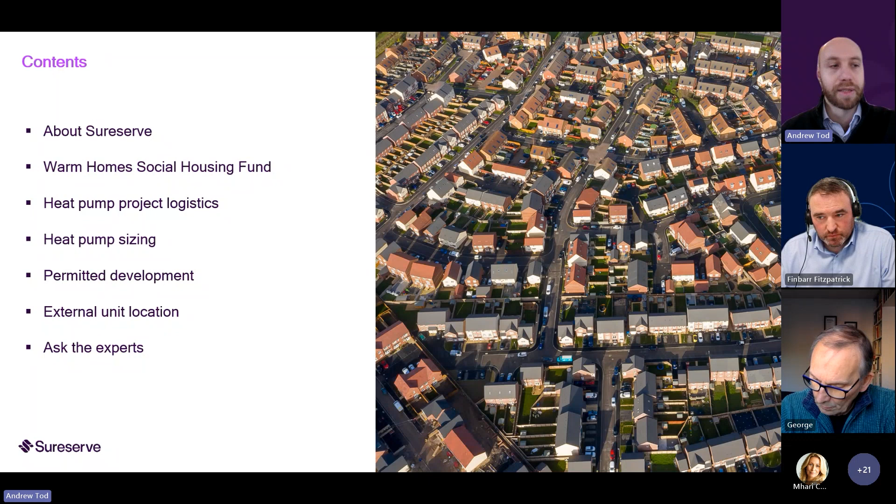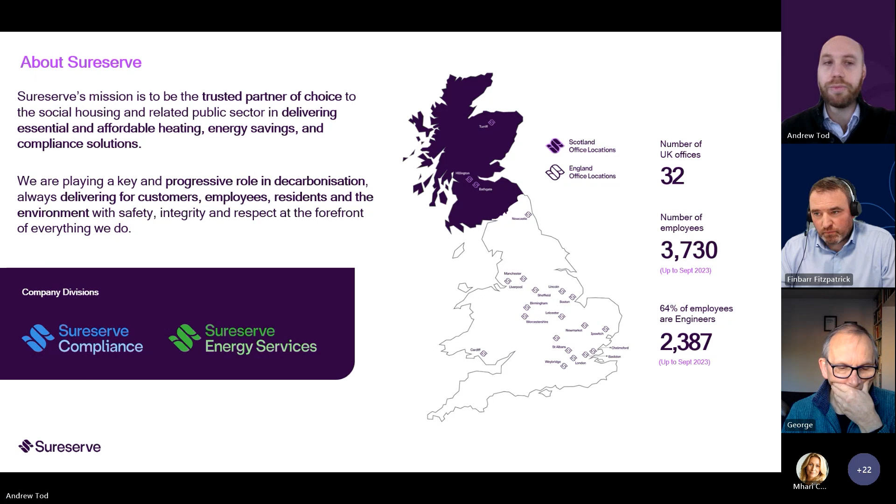We cover the big 6 of building safety and compliance, and increasingly we're starting to cover damp and mould checks as well for the homes that we're in, helping to spot and remediate issues early and protecting residents, and also helping housing providers with compliance with Awaab's Law.

And then on the energy transition side, we're leading social housing providers on their decarbonisation journeys, from typically the start position of predominantly fossil fuel heating systems towards a fully decarbonised housing stock. This would typically involve looking at housing stock data and developing long-term programs of retrofit, looking at opportunities for fabric improvements and ventilation, and then where we can upgrade renewable heating systems and inclusion of solar PV and batteries, and then monitoring homes post-retrofit to ensure buildings and heating systems are performing as intended, and looking out for opportunities for preventative maintenance.

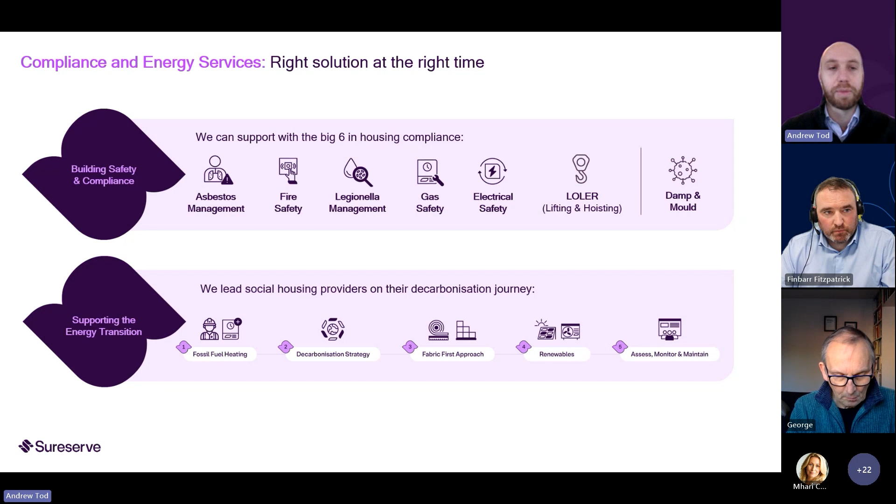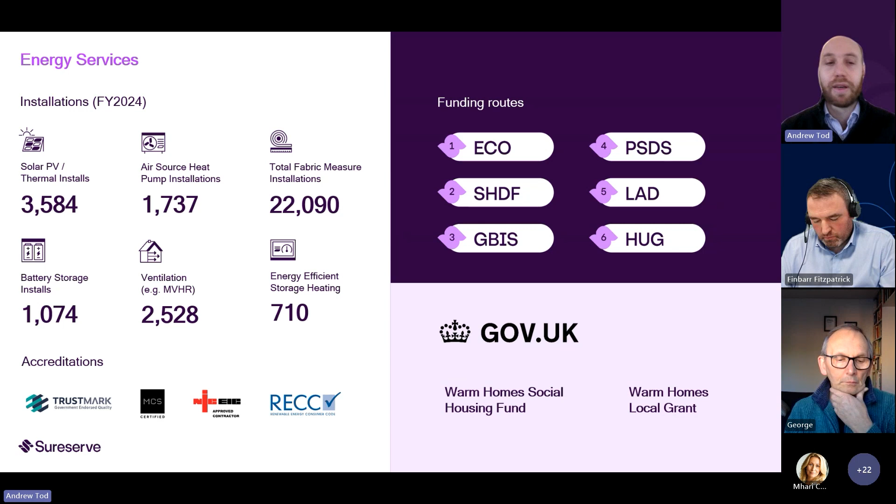This data on screen shows our installation numbers for low carbon heating and renewable and fabric technologies in 2024. And these cover all of the major government grant funded schemes. And we're also gearing up to deliver many more in 2025 under the Warm Homes Social Housing Fund and the Warm Homes Local Grant, which we've got the full set of accreditations to deliver.

And then we also have over 12,000 heat pump systems under service and repair contracts. The majority of those are air source heat pumps, about 10,000, but then various ground source, water source and exhaust air heat pumps. And so all of the insights that we gain from servicing and repairing these heating systems are fed back into our expert installer team. So they learn what works well and what doesn't in terms of how these heating systems are installed.

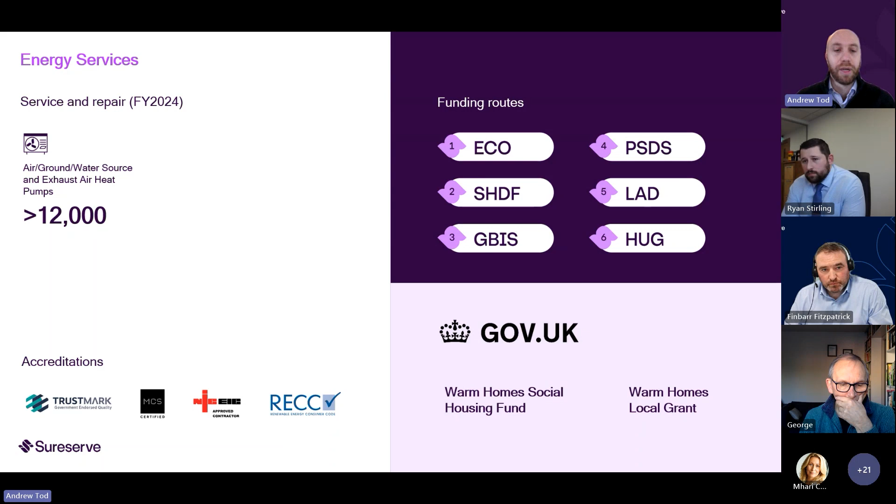Right, yes, so we've got the first poll where we want to hear from you. So firstly we want to understand your experience of delivering heat pump projects. So those will be launched, and then my lovely colleague Mhari will help to feed me the results because I can't see the screen, unfortunately.

So far we're looking at kind of 50-50. Well, it's changing all the time. But we have people who have not yet installed but are planning to, some who have delivered, and some who have done some individual but not at scale. So it's about 40% not at scale, 40% that have not installed but have some planning in place, and about 20% who have started to scale up.

Okay, great. So a good mix, and I'm sure that's probably common across the sector. People are starting to see heat pumps as the main technology of choice for decarbonising heating systems, so starting to gain experience on those projects.

The second poll then, if that could be launched, we'd like to understand your perceptions of heat pump projects. So is there nervousness, or are you fully behind them? So Mhari, once the results come trickling through, if you could just let me know what it's looking like.

Great, thanks, Mhari. Well, for those who are nervous, hopefully, throughout this webinar, you'll be able to ask questions for the expert installers. We'll be able to hopefully bust some of the myths around heat pumps and ease some of those nerves. So a brief spotlight then on Warm Homes.

Hopefully, if you're doing your Warm Homes Social Housing Fund Wave 3 application, that's really all underway, nearly wrapped up, final checks and then submission next Monday. We know it's a really, really tough and stressful time, so yeah, really wish you all the best of luck with those.

Wave 3, you would have noticed, marks a significant change in that there's more active encouragement from DESNZ of applications with low carbon heat technologies in them, with the strategic priorities section of the guidance giving more points to applicants that install low carbon heating at scale. They want to see that growth in low carbon heating, and particularly in air source heat pumps, and they want to see good case studies coming off the back of them.

As with previous waves, the same criteria apply, and that bills shouldn't increase as a result of replacing heating systems. So that might mean you need to do some fabric improvements as well. But you need to really take care of the modelling of the heating system upgrades to make sure you are proving that bills don't go up. Properties aren't eligible if they've received other sources of funding, such as the Renewable Heat Incentive or Boiler Upgrade Scheme. And then eligible low carbon heat technologies must be SAP compliant.

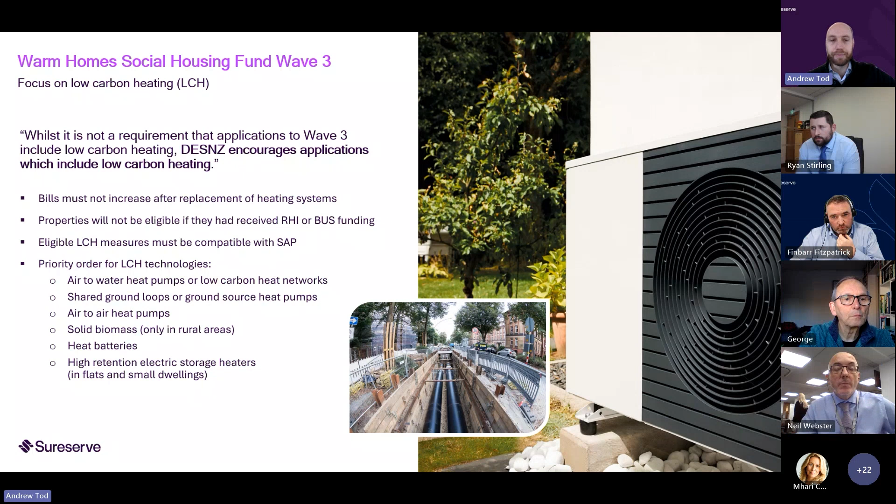Quick note on hybrid systems, which Sureserve do see as a useful transition technology on the route to decarbonising our homes, particularly given the behavioural adaptations that are required for some of the technologies. So they are eligible under Warm Homes, but with certain caveats. In terms of what is eligible, there could either be a new system made up of several units, it could be a fully integrated system in one unit, or heat pumps installed alongside existing A-rated gas boilers.

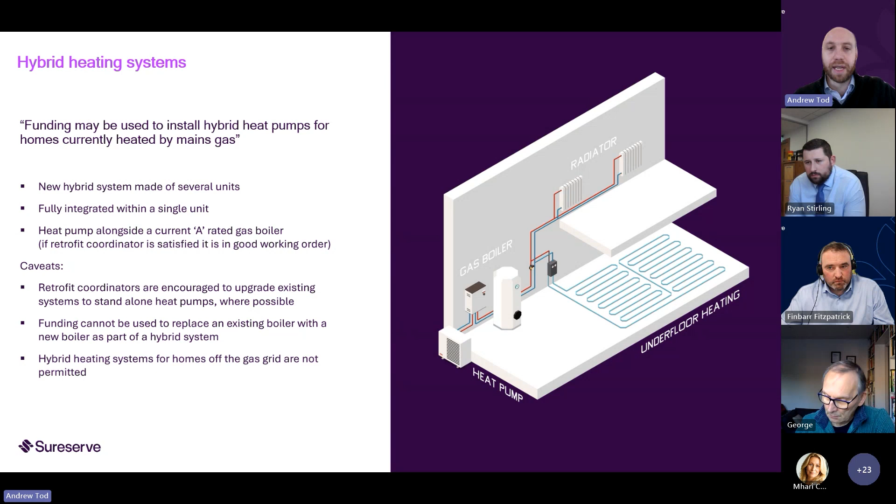The caveats are that the retrofit coordinators must be satisfied that the boiler's in good working condition, and that they've investigated other options for upgrading to standalone heat pumps where possible. But yeah, it's worth exploring these, and we can also take questions on hybrid heating systems later on.

In terms of the logistics of heat pump projects, just like any retrofit projects, they really need to be well planned in order to manage any issues and risks. So during the planning stage, you'll have to be clear about the start and end dates of the project, both for individual dwellings, but also the project as a whole. You'll need to plan for access during installation, accessing inside and outside the homes. And you'll need to conduct appropriate risk assessments and health and safety plans that cover both your contractors and residents, particularly if they're staying in the homes during the retrofits.

During the installation phase, then, you'll need to consider how to get heavy plant to site, the time residents will need to be without heat and hot water, and whether or not you're providing any alternatives to cover them. And remember that resident disruption will be significant during this period, and needs really, really good resident liaison from an early stage. We'll cover some aspects of resident engagement later on.

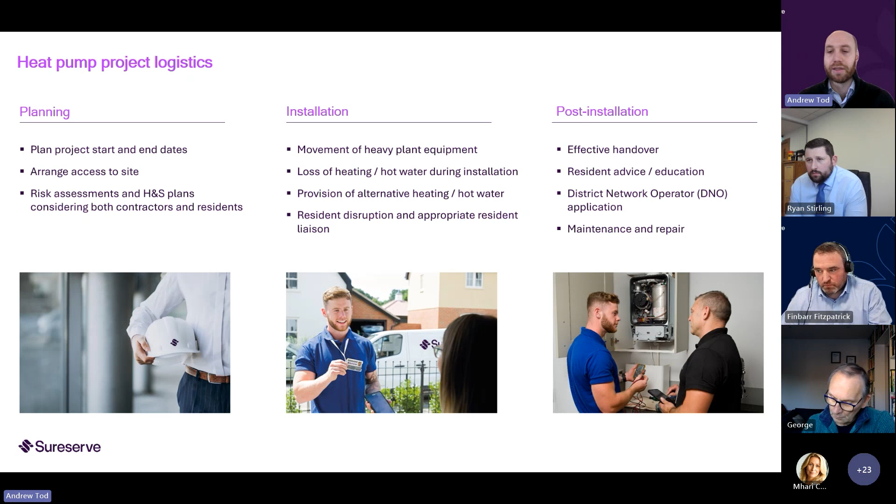And then post-installation, making sure that your DNO and any planning applications, if required, are submitted in good time, that the future maintenance and repair schedules are considered for your heating systems, and that they're well budgeted, who's doing what.

Heat pump sizing is crucial to good operational efficiency. You need to really play that balance of over or undersizing and try and get it just right. If you undersize things, you might struggle to meet the heating load, hot water demands, leading to running the heat pump continuously, which can increase energy bills and lead to more maintenance and possibly a shorter lifespan.

Oversize it, and you're unnecessarily increasing the capital cost, and the heat pump could short cycle, which means it's frequently turning on and off. That can lead to reduced efficiency and increased maintenance. So do double check things with your installer, who should be carrying out room-to-room heat loss calculations and sizing the heat pump effectively, also checking pipework, radiators, and other heat emitters.

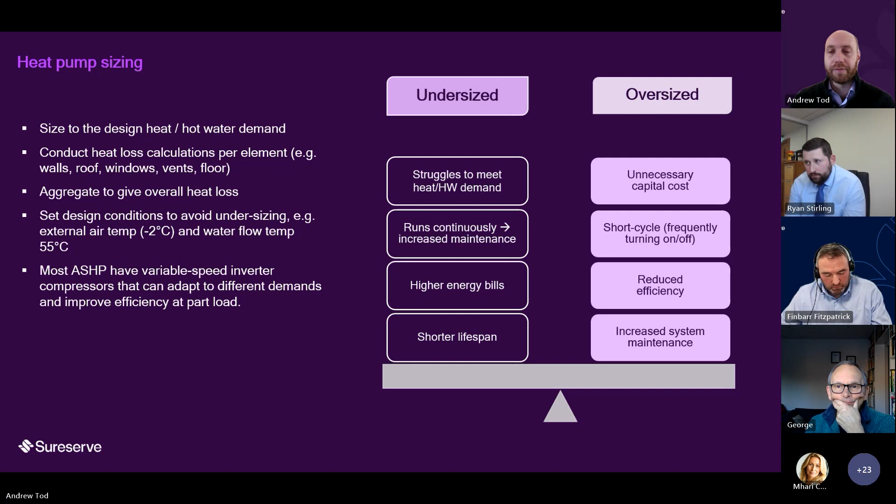There's also useful guides under the Microgeneration Certification Scheme, the MCS website, which we'd recommend checking out, which would help upskill your teams on how to approach heat pump sizing. So when we're looking at heat emitters, pipework and cylinders, again, it's crucial that these are well sized to get the best performance out of your heat pumps.

Heat pumps are more efficient when we've got lower flow temperatures than we see with gas boilers. However, there are some high temperature units available. But good flow is achieved through effective pipework. And if your pipework is small, so microbore pipework, which has a diameter of less than 15 mil, that's going to really restrict flow. And also plastic microbore can further compound the issues. It doesn't necessarily mean that you'll need to upgrade things, but your designer or installer should have that view on whether or not your pipework needs upgrading to be suitable for your heat pumps.

In terms of cylinders, heat pumps don't produce hot water on demand, so you need a hot water source like a cylinder to work alongside your heat pump. These can be quite large, and particularly if you're switching homes with combi boilers to heat pumps, where you wouldn't typically have a hot water cylinder before, you need to think about where the cylinders go and communicate this early on with your residents, because they might lose some useful cupboard space in order to house the cylinder. So that just needs to be really delicately covered and communicated.

To get the same heat output from a heat pump with a lower flow temperature, you might need to increase the surface area of your heat emitters. So that might include replacing some of the radiators with larger models. Again, you need to think about how that can happen in practice and the space implications within the homes. But sometimes radiators don't need replacing; they might already be oversized and ready to take on heat pumps. And again, do check with your heating engineer, your installer, who'll be able to give you that view as to whether or not your radiators need replacing.

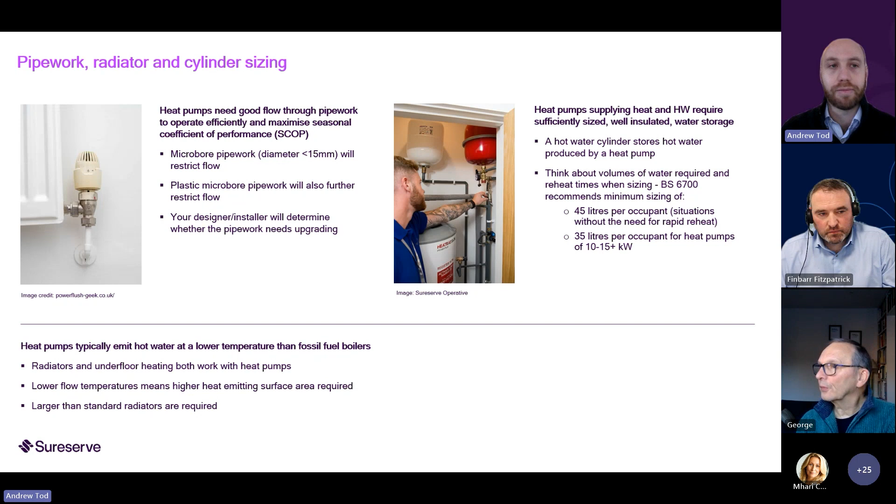Okay, so quickly on permitted development, air source heat pumps can be installed under permitted development rights, but subject to certain conditions. And as I mentioned, there's been some updates on these, which were announced just this morning, which I've highlighted. Some of the key points of permitted development are that you can only install one heat pump per property as permitted development. And the change that was announced today is the size of the outdoor unit should now be no bigger than 1.5 cubic meters, which should normally be the case in terms of the units which are out there on the market.

Another update is that the 1 meter from a property boundary rule in terms of where to house your external unit has been scrapped. So that was in place due to perceived noise complaints, but research has shown that they're actually not an issue. And so that's a really positive step forward to help unlock some of the planning issues to do with heat pump installs. In terms of installing on roofs, you can put them on a flat roof, can't put them on a pitched roof. If they're on a flat roof, they should be at least 1 meter from the edge of the roof.

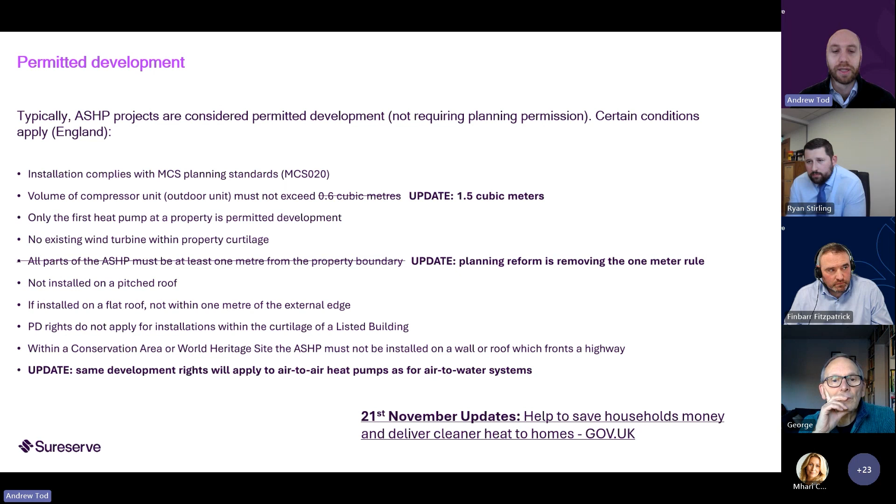And I think the last point, the same development rights now apply to air-to-air heat pumps as to air-to-water. It's always worth checking with your local planning authorities whether or not permitted development applies to your heat pump projects. They'll have a really good understanding of the rules and regulations that apply and be able to guide you, which will help you when you're specifying and going out to your installers just to make sure that they get it all right within your requirements.

So a bit on the external unit and how it's located. So it's not just about satisfying permitted development rights, it's about optimizing performance and efficiency. So you need to install the external unit on a flat level surface, which has good drainage for condensate. And it shouldn't be directly below a window for habitable rooms, habitable meaning bedrooms or living rooms. That's to avoid noise disturbance and vibration as well.

And ideally, it should be close to where the heat enters the building to avoid losing heat through long pipe runs. In terms of airflow, you need sufficient space around the unit to get that good airflow, because this is where the air, which is actually going to go into the heating system and heat your properties, is going to come from.

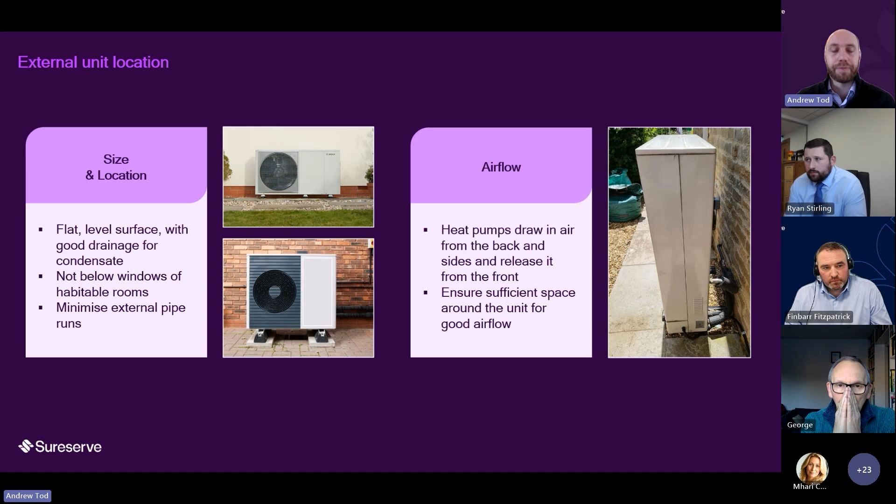And then in terms of weather, try and avoid spots where you might get extreme weather, which can really damage the operational efficiency and the lifetime of the units themselves. So look for those sheltered spots, which is going to really help you with maximizing performance.

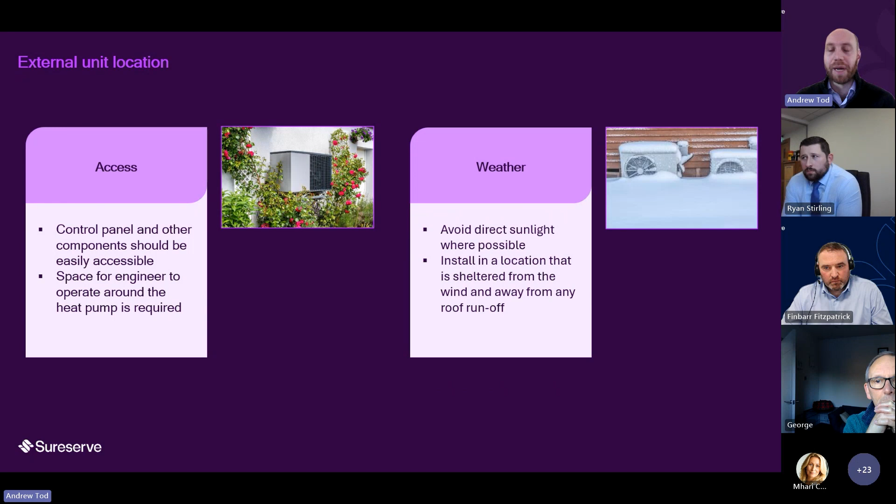Excellent. So I think you've heard enough from me. So I'd like to turn over to a couple of our expert installers. So we've got Ryan Stirling, who's our renewable technology manager from Sureserve Energy Services, and Finbarr Fitzpatrick, head of renewables from Sureserve Compliance South. So Ryan, perhaps you could just come on, introduce yourself, a bit about your experience in heat pumps, and then I'll ask you a couple of questions about the design and feasibility stages.

Yeah, so Ryan Stirling, renewable technical manager for Sureserve Energy Services. I've been in the industry just shy of 15 years now, working with heat pumps, all renewables really. And I practice what I preach because I've actually got a heat pump in my own house, so I'm not telling any lies about it.

Good stuff. Excellent. So in that initial feasibility stage, what should social housing providers really be looking out for in terms of their housing stock that might determine whether or not heat pumps are suitable for their homes? In terms of the housing stock, an easy hit would probably be something that's recently had some fabric upgrades done. You're looking for a more efficient property to reap the benefits of a heat pump. Something maybe you've looked at PV and battery installations on, maybe about a mid-band D on an EPC and above. Something that's pretty much there and ready. It's usually a go-to, and outside a conservation zone because it adds time onto applications.

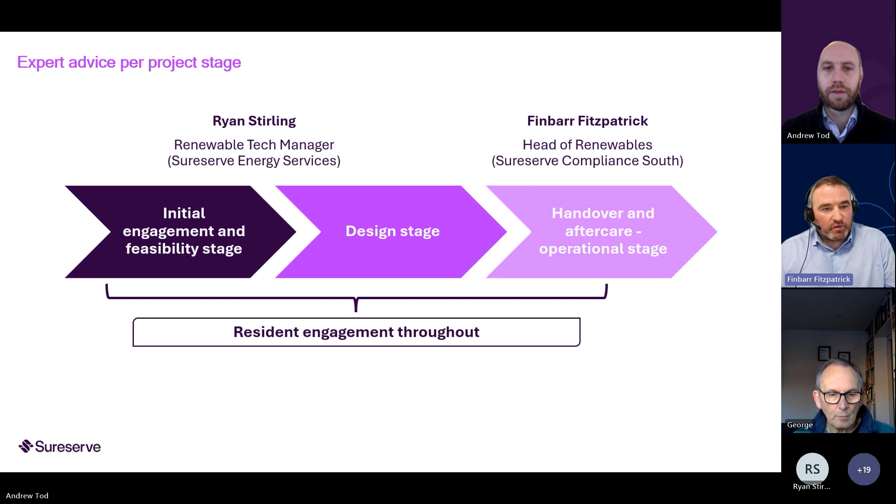So if I was looking for a steady temperature of 21, previously we would have run it to 23 or 24 and let it cool down to 15 or 16, and just kept continuing that process. With low temperature heating, if we're looking at 20 or 21 degrees, we set back to maybe 19 in our off periods, and then it's very easy for it to jump back up those 1 or 2 degrees. It's key not to let it drop right down.

Yeah. So that lower but steady and constant level of heat, and it's that mindset change that we need to communicate to residents: it's not going to change your overall comfort, it's just going to change the immediate perception of how you're getting heat in your home.

Yeah, absolutely. I think our biggest challenge over the next 5 years is end user awareness of how low temperature systems work. That'll be one of our hurdles to get over. The more engagement pieces and on-site work we do, that's the only way we can really push that until we start seeing ads on TV for it from some of the big manufacturers. Yes, exactly. There's probably a whole public information campaign needed around heat pumps, as there was with smart meters, and going back in time, with switching over to gas. But that's something we're not going to solve today.

Probably a question for both of you: what are your thoughts on higher temperature units, and overcoming some of the behavioural issues we've talked about through high temperature heat pumps?